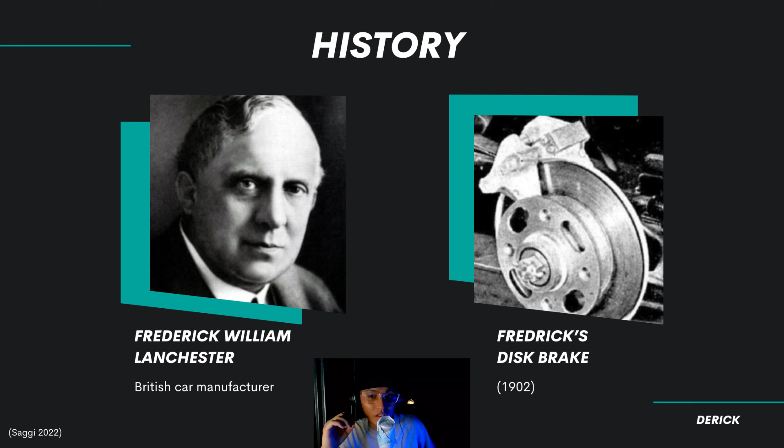So here's a little history lesson about disc brakes. The first disc brake was invented by a British engineer called Frederick William Lanchester in 1902. However, it took several decades for the disc brake to become widely adopted in the automotive industry. Before that, the automotive industry had been using drum brakes. The transition from drum brakes to disc brakes began around the 1950s and 1960s. Sports cars and high performance vehicles were the first to adopt disc brakes due to their superior performance characteristics. Over time, as manufacturing processes improved and costs decreased, this brake became standard on more mainstream vehicles. By the 1980s and 1990s, most new cars were equipped with disc brakes on the front wheel, and many also had them on the rear wheel.

Formula One, one of my favorite things to watch during the weekend. The first World Championship took place at Silverstone Circuit in the United Kingdom on May 13, 1950. In fact, Silverstone Circuit is still one of the circuits in the F1 calendar today.

Braking is the action of slowing down or halting the motion of a vehicle or a rotating component. In Formula One, also known as F1, this process is pushed to the extremes, and effective braking is crucial for both performance and safety.

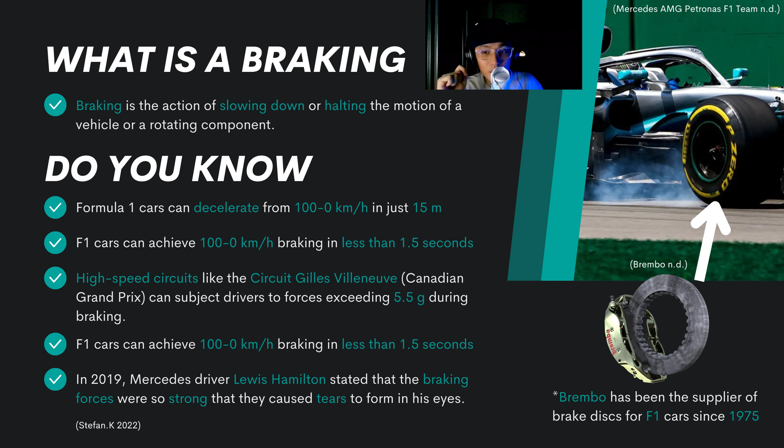An F1 car can decelerate from 100 to 0 km per hour in just 15 meters, and not only that, they can achieve this in less than 1.5 seconds. This kind of deceleration can subject the driver to forces exceeding 5.5 g, that's 5.5 times the force of gravity. In 2019, Mercedes driver Lewis Hamilton mentioned that the braking force was so intense it literally pulled the tears out of his eyes. Fun fact: Brembo has been the supplier of brake discs for F1 cars since 1975.

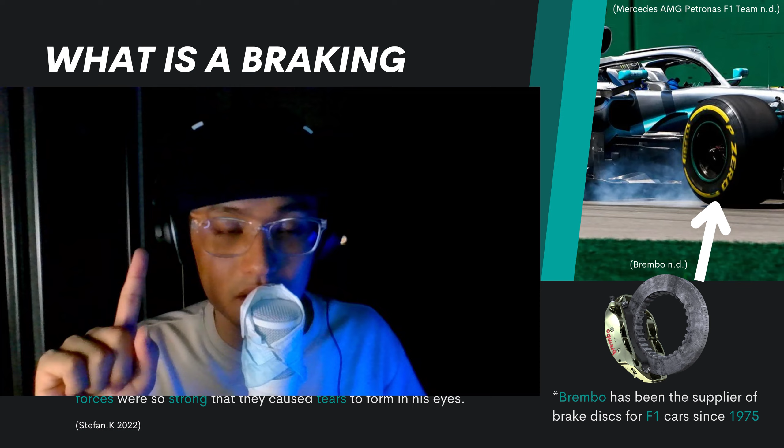With all these extreme conditions, the material used for Formula One brake discs must meet several key properties. The first is mechanical strength. The brake discs must withstand the intense stresses of high speed rotation and sudden braking forces without deforming, failing, or overheating. Second, high friction coefficient.

The brake discs must have a high friction coefficient so that it allows the F1 car to achieve rapid deceleration safely. Third, high thermal resistance. During braking, the temperature of an F1 brake disc can exceed 1000 degrees Celsius, and the material must maintain its performance under these extreme hot conditions.

Fourth, lightweight. When building an F1 car, you want to keep the weight as low as possible to achieve a higher top speed. So reducing the weight of brake discs contributes to improved handling, responsiveness, and fuel efficiency of the car.

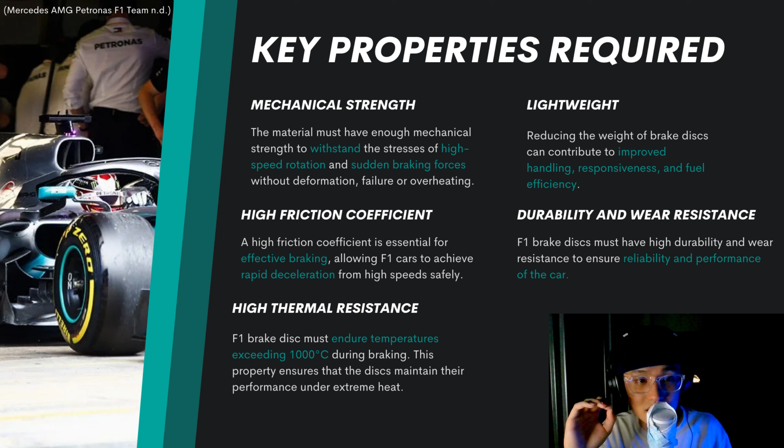Last but definitely not least, durability and wear resistance. F1 brake discs must have high durability and wear resistance to ensure the car is reliable and consistently performs over time. If the durability and wear resistance is not high enough, it is dangerous to both drivers and audience around the track. To meet all these requirements, different types of brake discs will be compared to conclude the most suitable material for F1 brake discs.

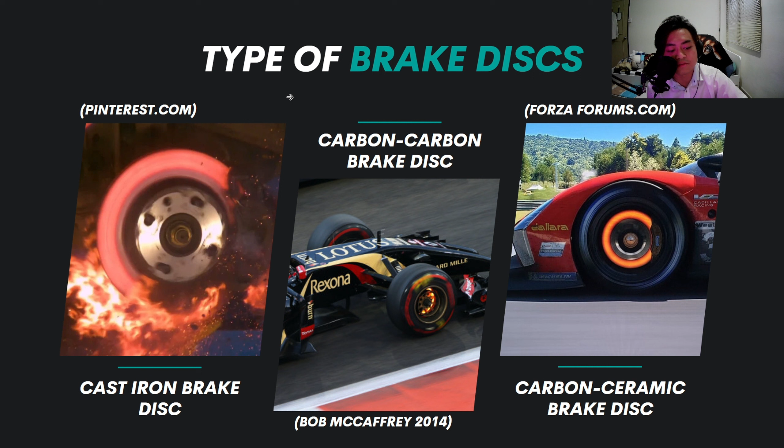Hi, my name is Nathan, and I will discuss the types of brake discs. As for brake discs, there are three types: cast iron brake disc, carbon-carbon brake disc, and carbon ceramic brake disc. As brake discs are made of a variety of materials, surely there should be pros and cons to different types of brake disc.

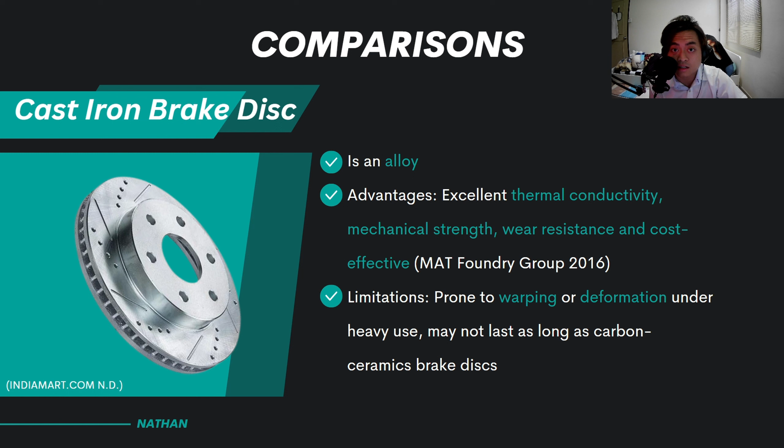Firstly, the cast iron brake disc is made from an alloy. The ones most commonly used are gray cast iron. Some of this material's qualities are excellent thermal conductivity, mechanical strength, and high wear resistance. This type of brake disc is also very cost effective, meaning it can be produced at low cost. However, using this material could cause the brake disc to be prone to warping and deformation under heavy use, and it may not last as long as a carbon ceramic brake disc.

Next, the carbon-carbon brake disc is a composite consisting of a carbon matrix reinforced with carbon fiber. This type of brake is specifically used in Formula One and is considered the most superior material when it comes to braking systems in Formula One cars. Some of its qualities are extremely high heat resistance and lightweight. Such brakes are used in high performance applications too, such as racing cars and fighter jets. Some of its limitations, however, are that they have a shorter lifespan than other brake discs and also require high costs to be produced.

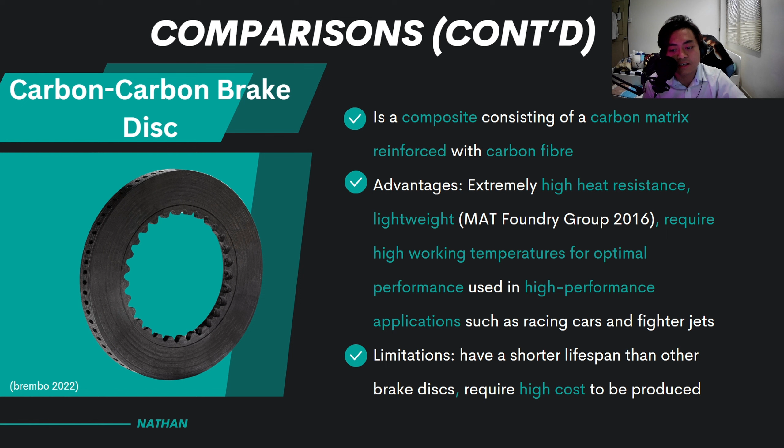Lastly, the carbon ceramic brake disc is a ceramic matrix called silicon carbide infused with carbon fibers. This type of brake is widely used in sports cars and supercars. This material's qualities are having a higher friction coefficient, meaning a shorter brake distance, being very abrasion resistant to brake pads, and being more suitable for daily driving temperatures. It is also less expensive to produce than carbon-carbon brake discs. Moreover, this material's shortcomings are that it requires more cost to be produced than cast iron brake discs.

Overall, the best brake disc material for Formula One applications is the carbon-carbon brake disc, as it has proven to be the most superior out of the rest of the brake disc types.

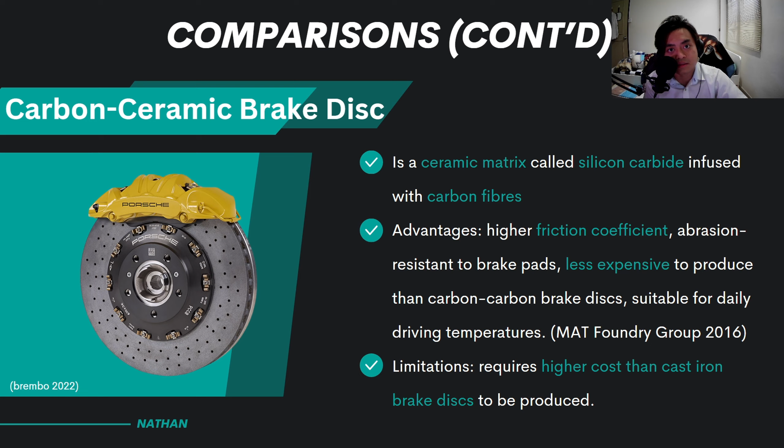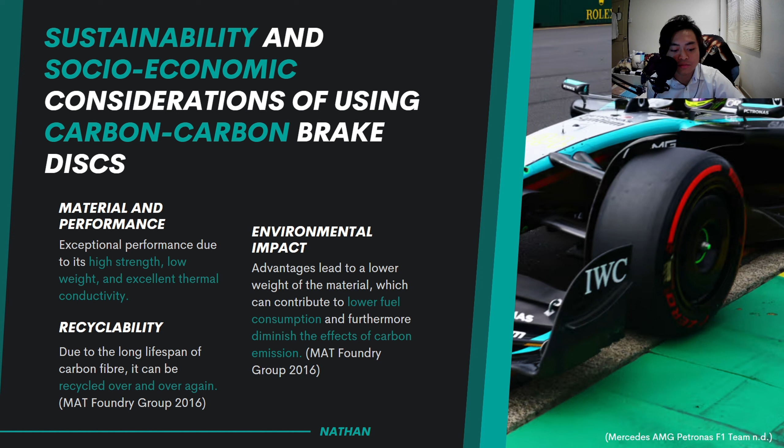Now we will move on to the sustainability and socio-economic considerations of using carbon-carbon brake discs. As for its material and performance, carbon-carbon brake discs offer exceptional performance in Formula One racing due to their high strength, low weight, and excellent thermal conductivity. Next, the recyclability of carbon-carbon brake discs allows them to be reused over and over again, meaning it can bring a great impact to the environment. Speaking of environmental impacts, due to the lower weight of the material, it can contribute a lot to lower fuel consumption in Formula One cars and also diminish the effects of carbon emissions.

In conclusion, braking in Formula One demands materials that can withstand extreme conditions while providing optimal performance. After evaluating various options, carbon-carbon brake discs emerged as the most suitable material for F1 brake discs. The combination of mechanical strength, high friction coefficient, thermal resistance, lightweight, durability, and wear resistance make them the perfect choice to meet the demanding requirements of F1 braking systems. By selecting carbon-carbon brake discs, F1 teams can guarantee peak performance, safety, and competitiveness on the demanding race circuit.